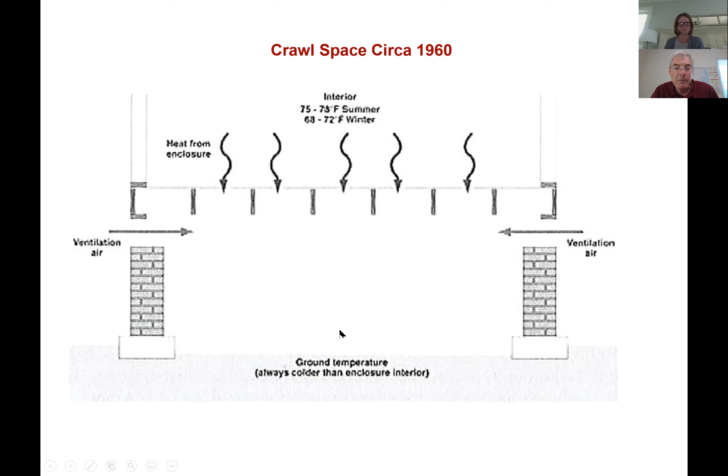Not a lot happening here, but it says the ground temperature was always colder than the enclosure interior. Let's dive down into that a little bit. Heat is transferred three ways: conduction, which happens in the crawl space, convection, and radiation. That means that the inside of a home, if it's 75 degrees inside, by the time that heat transfers all the way down, it's about 67 or 68 degrees on the joist of the crawl space.

It's getting heat from the inside of the home all the way down to 67, 68 degrees, but the ground temperature is 60 degrees. Pretty significant difference between 68 degrees and 60 degrees.

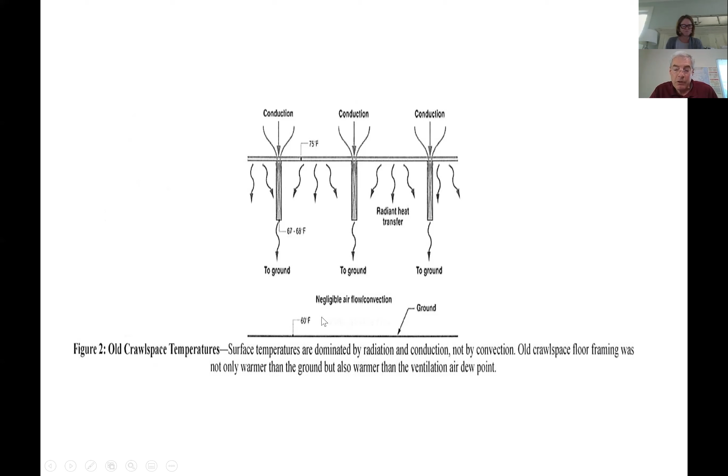So what does that really mean? It means we do live in the hot, humid South. When humidity enters a structure such as the crawl space, it's looking to condensate. Condensation always happens at dew point, or the coldest area, which used to be the ground.

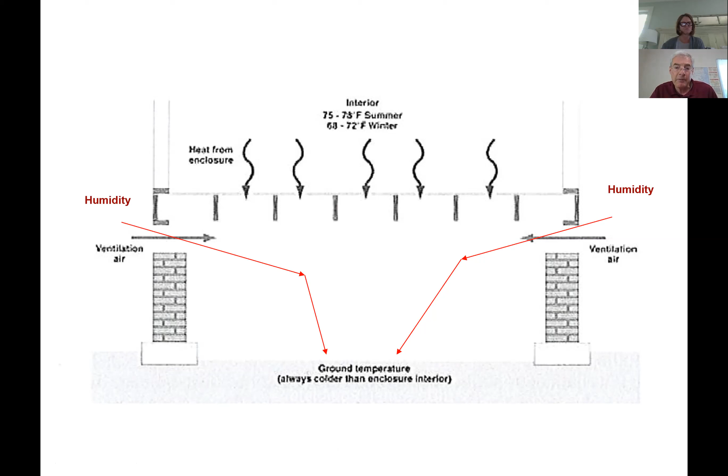Let's get into a little more about dew point. Here's the definition: dew point is the temperature to which air must be cooled to become saturated with water vapor. When further cooled, the airborne water vapor will condense to form liquid water. When air cools to its dew point through contact with a surface that is colder than the air, water will condensate on that surface. So dew point is where this water vapor condensates into water.

Dew point used to be the ground of a crawl space. But something happened in the 70s that changed that. And those of us who remember the 70s know we had some really good things happen, some really ugly things happen, and some bad things happen to crawl spaces in the 70s.

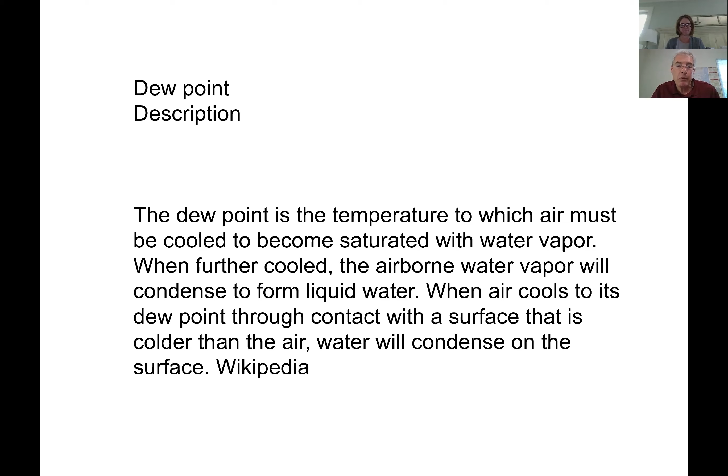So let's start with the good things. What were the good things that happened in the 70s? My personal opinion is that the 70s was the best decade for classic rock and roll that some of us still listen to today. I'll give you Motown for the 60s, but for me, the best decade for rock and roll music was the 70s.

Well, what was the bad thing that happened to crawl spaces? It's one of those unintended consequences, but we had the OPEC oil embargo. Most people remember the gas lines, gasoline being more expensive, people running out of gas, the odd and even days. Basically the cost of energy went up for the first time in history, and the cost of heating a home went up. So what did we do? We insulated everything, including the crawl space.

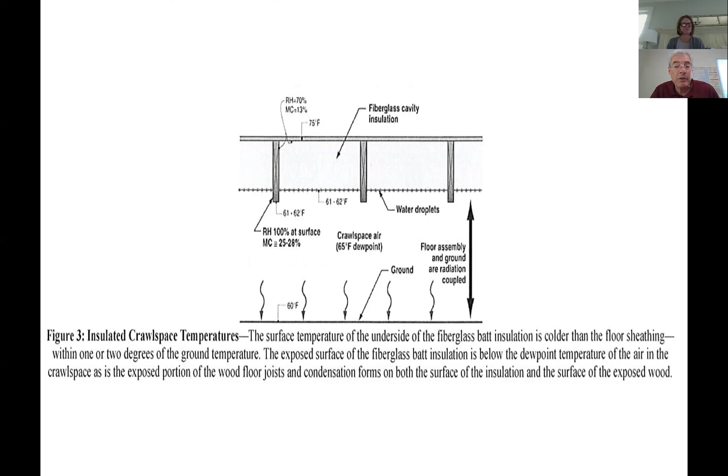Then something else happened in the 70s to most homes—something we in the hot, humid South are so glad of, thanking the good Lord for every summer: we started installing central air conditioning. Great, but guess what? Those ducts are cold. So as humidity comes into the crawl space every summer and no longer collects on the ground, it collects around the air conditioning ducts, in the fiberglass insulation, and on the wood. It collects a little more every year, and the trend line goes up and up, until after about 20 years of absorbing moisture, you get a crawl space that looks something like this.

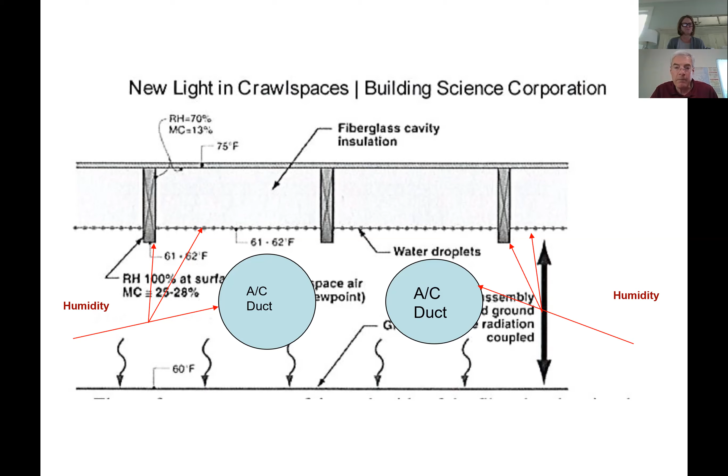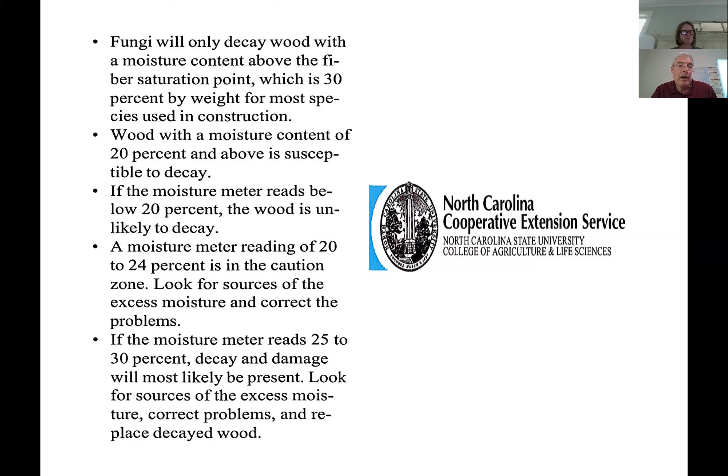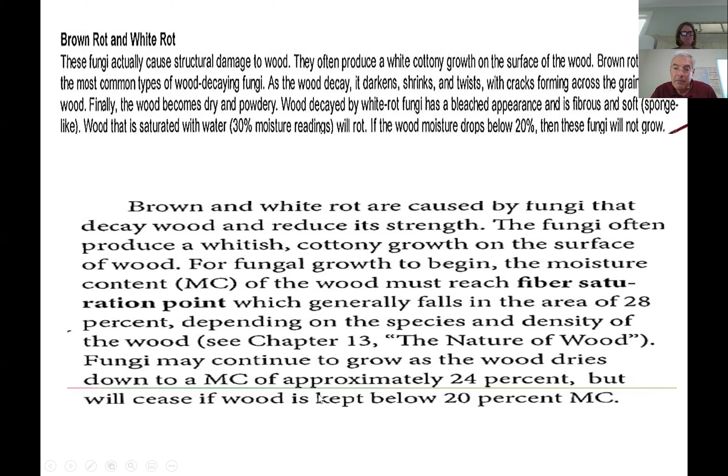This is a picture of white rot in the crawl space. Again, you see the insulation has fallen. I know it's hard to see in this photograph, but white rot has, I call it, body to it. It looks like if you flatten a cotton ball up against the wood. There's other fungi that can occur in a crawl space. It can be on the surface of the wood, it can be gray in appearance. There's multiple fungi that can happen in a crawl space. NC State calls this surface growth. It does not damage the wood, so to speak, but it can be gray in color, with no body to it.

Here's a quick war story. I did have a seller of a home, a very nice home, probably a $500,000 home, call me in tears one day and say, I've got a major issue and I'm moving out today. The moving van was literally in the driveway. We had done some pest control work, but nothing mentioned about issues in moisture in the crawl space. So I went over there, saw the home inspection report. The home inspector didn't say if, and, or but — it said white rot in the crawl space. So I said, let me go check it out. But I also noticed in the inspection report there were no pictures, no evidence of it.

I went down and looked. She did have some surface growth in a few areas, but the wood moisture reading was not high enough to sustain white rot, nor was there any body to that fungal growth. It was just surface growth. But another company had already come in there and quoted $14,000 worth of remediation work for a problem that didn't exist.

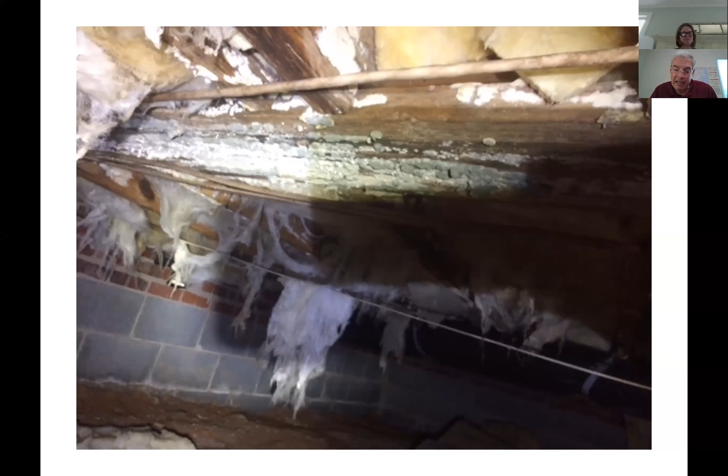And of course, that's what the buyer wanted, and I can kind of understand that. But again, always ask for evidence.

This is another picture of white rot. And what's interesting about this picture is you see there was no insulation in the home. It was an older home. So insulation is not always the culprit. But again, this house...

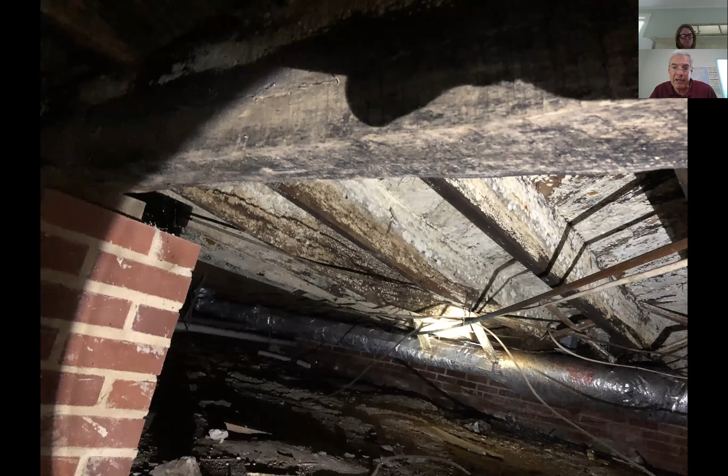Unfortunately, the lady who lived there was using plywood inside the home because the floors in her kitchen were so soft, she was afraid she was going to fall through. And she was about ready to. Basically, her whole floor system had to be replaced.

This is brown rot. Now, you can have fungal growth on the surface of the wood that is dark in color, but it's not necessarily brown rot. To really know it's brown rot, you've got to break open that piece of wood, which isn't hard to do if the wood has been attacked by brown rot.

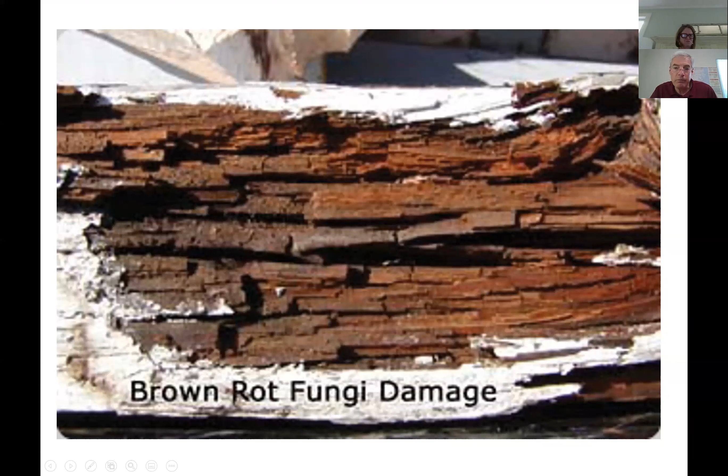You see how they form these little rectangles? That is the evidence of brown rot. On this one, the surface is actually white, but that is brown rot. These fungi will take the strength out of wood very quickly. They make really good tool holders, but you'll have to start replacing joists if you let brown rot or white rot set into a crawl space.

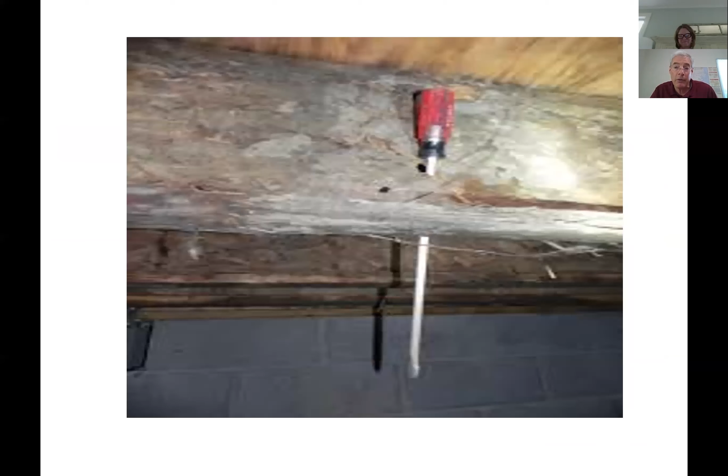Okay, I got a question anyone can answer, through chat or whatever—does anyone want to tell me what kind of growth this is? No, but that's what we see all the time.

Well, it's a trick question because that is not fungal growth. That's actually residue from camel crickets, or cave crickets. Here's a picture, it's hard to see because I blew it up—this is a camel cricket. They love to leave their little residue all over, these little black dots.

But I did have a home inspection report where the home inspector said black mold. And you talk about killing a sale—you just say the word black mold and it's like, okay. He said how he tested for black mold is he took his gloved finger and ran it across the surface, and it smeared. Fungus will smear, and camel cricket feces will not smear.

I'm not a microbiologist, but I remember enough biology from the 8th grade to know that's not how you test for mold. This picture actually came from NC State, it's not mine—something they have on their website about camel cricket residue. But you see that a lot. They love the moisture in the wood and leave their residue all over the place.

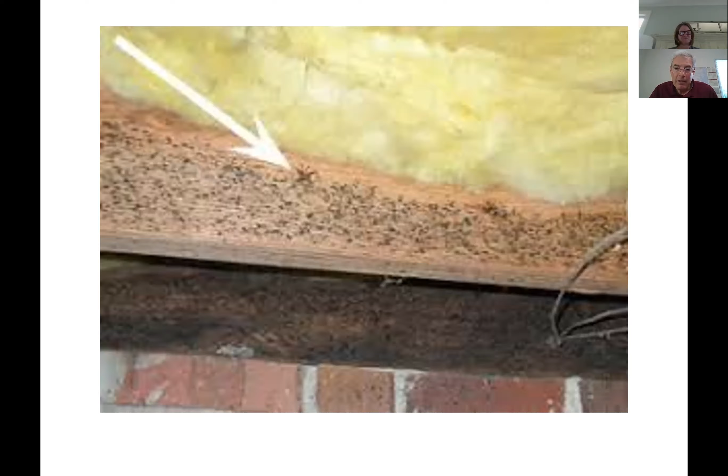Okay, got a pop quiz here. Y'all didn't realize you have a pop quiz, but we now know where crawlspace moisture comes from. We know it takes a little time to develop, and it has to be at least 30% wood moisture. So here's a home—it's got 40% wood moisture content. It's in the danger zone.

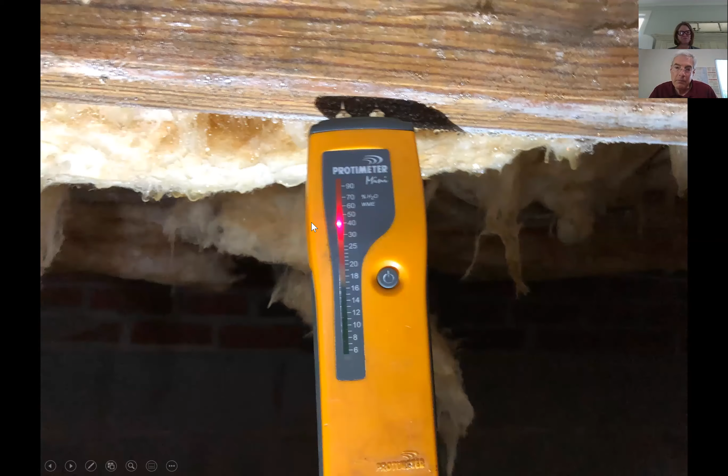If you look at this picture, you see some surface growth, but you see the white that's developing here, the white body—that's actually the start of white rot. It's very difficult to see here, but in this insulation there are beads of condensation. This insulation is just saturated with condensation.

So my question is, does anybody want to guess how old this house was? Let's give them a minute. All right, somebody take a guess.

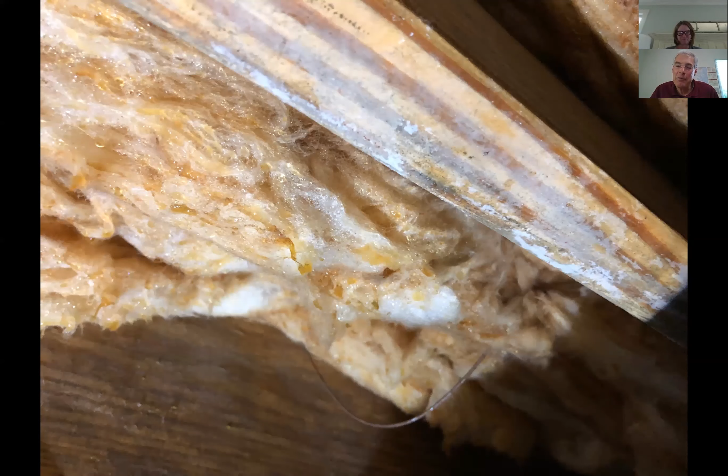Tim Ferguson says a year—okay, not bad. Susie Shackman says it's brand new. Craig says 5 years. Y'all are better—I've had other people say it's got to be about 20 years old. This is the house. It was 3 years old when we discovered the issue.

What caused this? I mean, it's a well-built house—I actually know the builder. This is close to our office here in Burlington. Well-built home, and you talk about a difficult conversation to have with a homeowner—your nice new home here is starting to have rot in its crawl space. What caused this? When they built the house, they put this deck on, a beautiful deck.

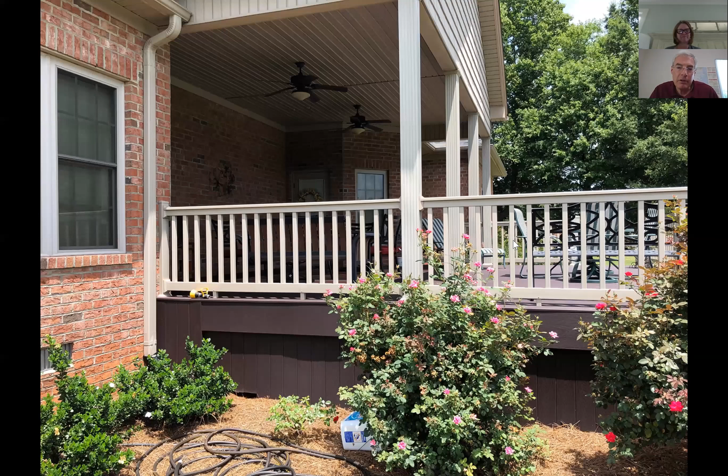This is actually made with Trex, so it's not wood—more like a composite. It's actually underpinned here; the owner's a little elderly and didn't want anything getting under her deck. But it's also on the south side of the house, and when I was there that day, I could not even put my hand on the deck, it was that hot. So you have superheated air coming in, and there are foundation vents underneath this deck.

Superheated air comes in and condensates all along the air conditioning ducts and insulation in the crawl space, and all along her back wall, she was developing white rot, and we had to correct that issue. This is something you can check if a house is being sold or bought: look wherever you see an attached deck or patio, not one that's 10 feet off the ground, but if it's close to the ground, understand it may have an issue with crawl space moisture due to that.

We'll stop here again, any questions now? So we have a question from Tim Ferguson that's probably related a bit more to the first part: is the humidity higher in the house than the usual surrounding air?

Not necessarily. The air conditioning of the home is also a dehumidification part of the home. If you know, around your air conditioning, if it's outside, you'll have a pipe and you'll have water coming out, condensate coming out. What's happening in the air conditioning units of all our homes is that you're actually dehumidifying the inside.

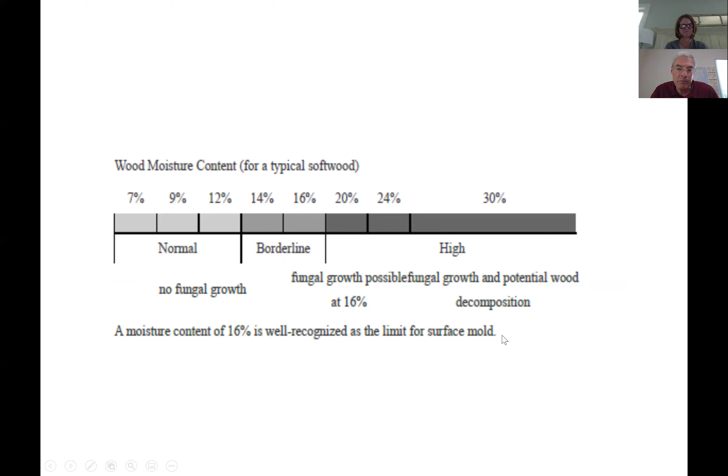This comes from Building Science Corporation. If you see, it says normal is 7 to 12%, 14, 16, and over 20 is high, which I agree with. And down here it says a moisture content of 16% is well recognized as the limit for surface mold. So keep wood moisture under 16%, and you won't even allow surface mold to occur. How dry does that ambient humidity need to be?

We won't worry about water activity, but here is something that gives you the wood moisture content and the ambient humidity in the crawl space. So 70% relative humidity will equate to a wood moisture content of 16%. We like to see wood moisture at 12 to 14%, which is basically 50 to 60% relative humidity. You achieve that by conditioning the crawl space in a few ways, which we'll get to in a little bit.

I think it's interesting, the 20% demarcation for danger in the crawl space, so to speak, that's 80% relative humidity. Crawl spaces can be cool in the summer, but they're also very humid, surprisingly humid.

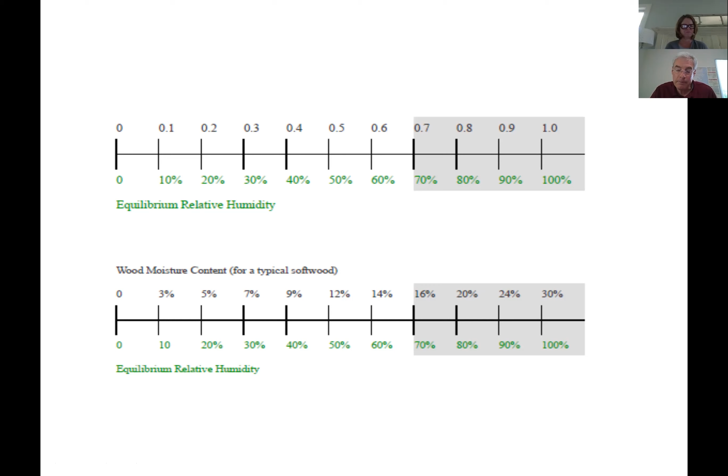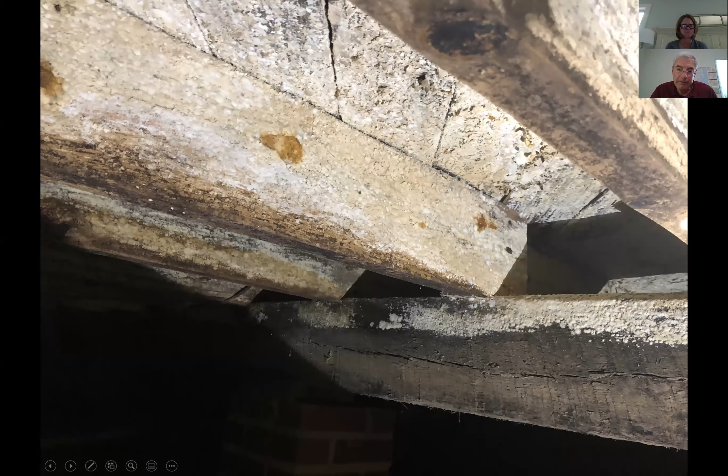It's something called the stack effect, which many of you may have seen. Whether it's your basement or your crawl space, it is cool down here, and as air warms, it rises. Pressure also changes inside a home - if you open up a door or a window, pressure changes, and you pull air from the crawl space into the indoor air, which can affect the quality of indoor air. Certain studies say up to 30% of the indoor air comes from the crawl space. Others say 60%.

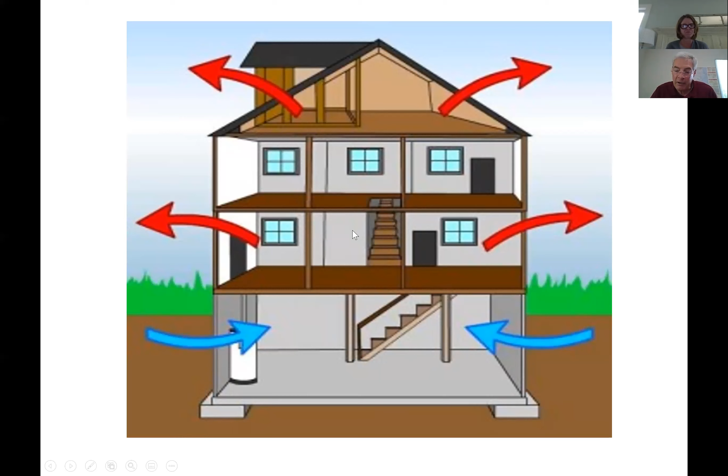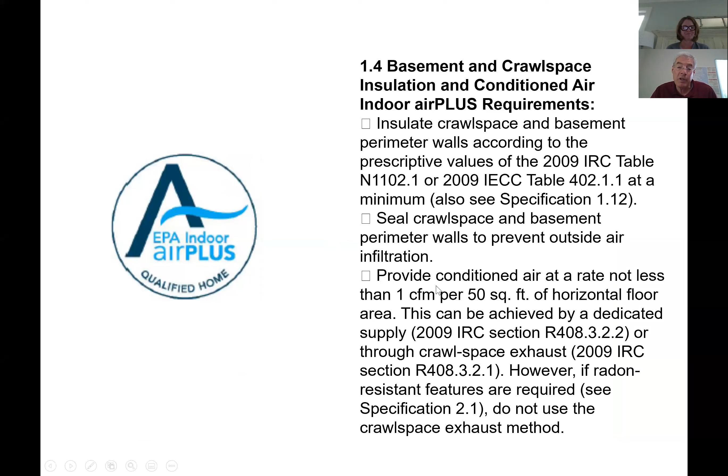It can affect the indoor air, so much so that the EPA came out with guidelines called EPA Indoor Air Plus. These are guidelines for building homes if you're concerned about indoor air quality. The document talks about different things, from what paints to use, to what fabrics to use. But for those of us in hot, humid air, it does say to seal crawl spaces and basement perimeter walls to prevent outside air infiltration and provide conditioned air at a rate not less than 1 cubic foot per minute per 50 square feet of horizontal floor area.

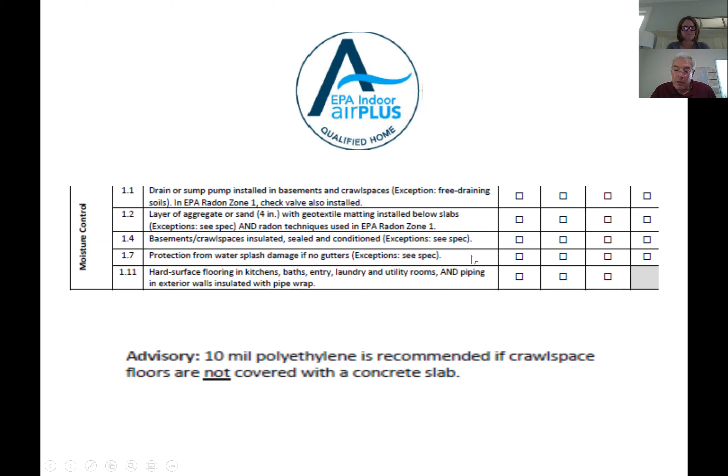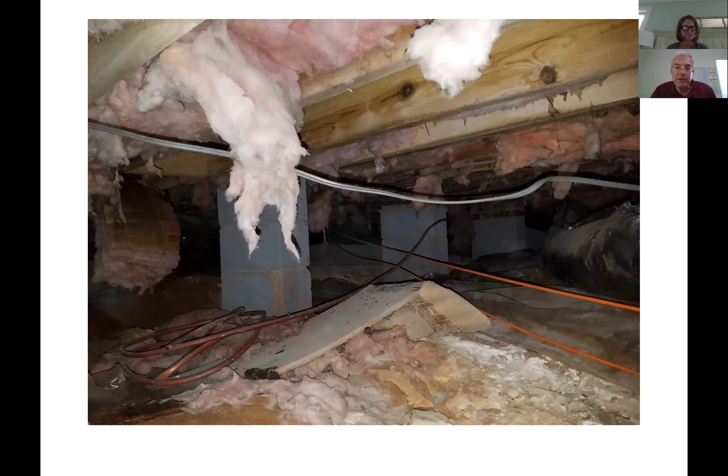Another thing the report says is that for us in the hot, humid South, basement and crawl space should be insulated, sealed, and conditioned, except in flood zones. So what that means is we talk about sealing up the crawl space - this is a before picture. What I want to tell you is that you seal up the crawl space from the inside, you don't close the vents. Here's a picture of the crawl space - here is a vent, and we go from the inside with basically what's called foam board. It's 2.5 inches thick, and we foam around it. The goal is to keep the hot, humid air and the cold air out of the crawl space.

They did have some moisture issues years ago. A contractor went in there and put a dehumidifier in. It wasn't built for the crawl space, number one, but they left the vents open, so they were trying to dehumidify their entire neighborhood. Well, that could be one reason the dehumidifier doesn't work anymore.

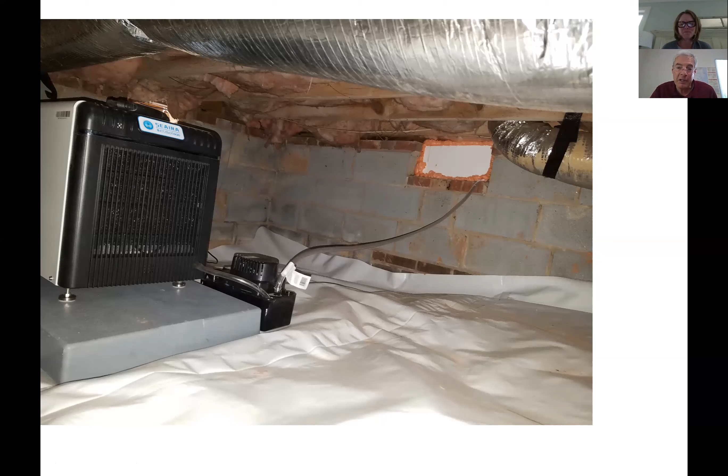Marty, I'm going to stop you just for a second because we're getting a lot of breakup on your end. I don't know if that's your connection going in and out. Let me see - it seems like I have good connection, connection on my phone. Okay, do I need to come back? Let's go for another couple minutes and then maybe, because we're missing some chunks. Okay, good info. Sure, okay.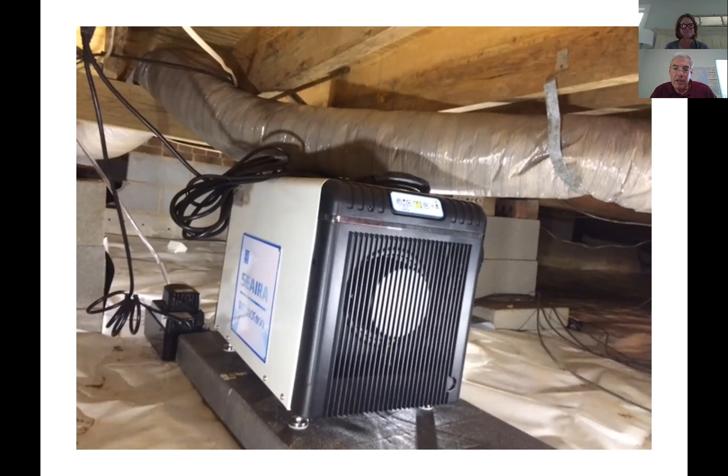Well, this is a conditioned crawl space, and this is our term - you see there's no insulation in the subfloor, it's been removed, no insulation on the wall, but we do put a dehumidifier and obviously a good vapor barrier here. This is the fully encapsulated crawl space, which is the better option, the best option, because there is insulation - not in the subflooring, but there is foam board insulation on the perimeter walls of the crawl space. Good, obviously thicker, 12 mil vapor barrier, dehumidifier.

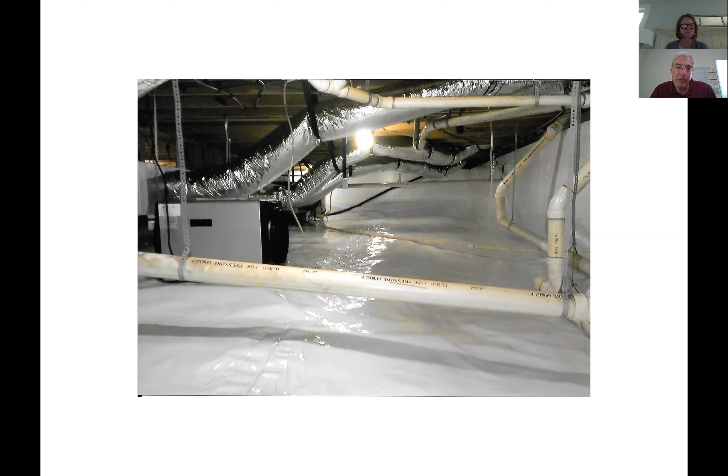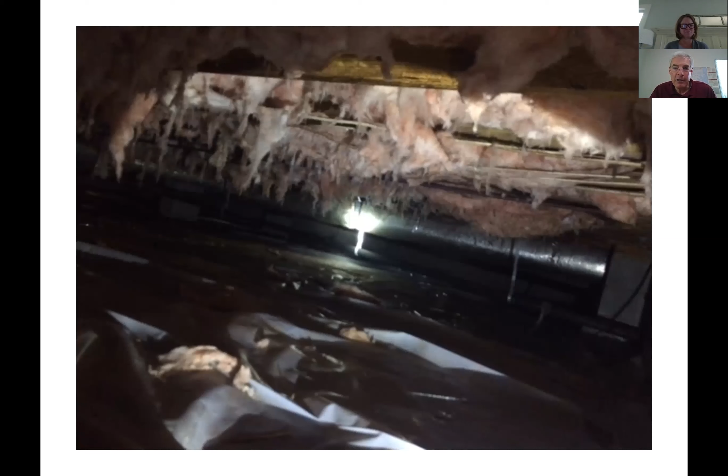On a personal note, my mom had breathing issues most of her adult life. It wasn't asthma, it was allergies, sinus - she was at the ear, nose, and throat doctor about every other month. I grew up in a basement home, which is fun to play in, but it's musty. My dad built a house for them after we all moved out, and that crawl space has no vents in it because they put conditioned air in that crawl space from when it was built, so no fungal growth will occur and the indoor air of their home stays as high as it can be. But what we want to do is not let the crawl space become this, because as realtors, if you have a client selling or buying a house and the crawl space looks like this, there could be major issues and major costs to repair it.

One quick final thing here. I inspected a house years ago. Older homes, as you can tell, have no insulation and thicker cut wood. So it's not a perfect scientific experiment, but you can see the wood moisture readings, where green is good.

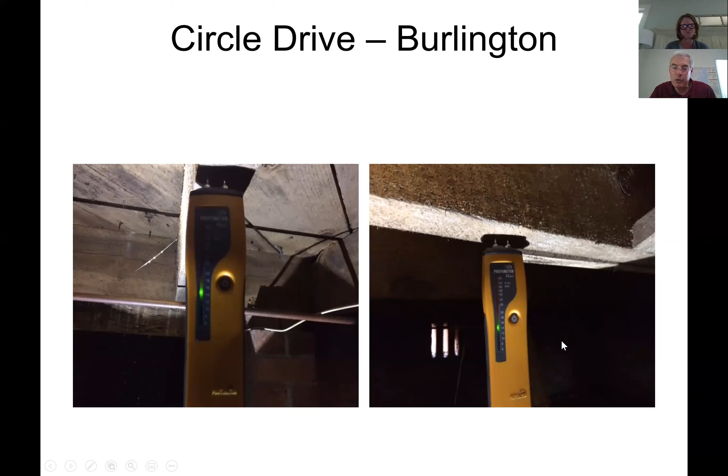It was good wood moisture in the main part of the crawl space. Right behind this area, they added a laundry room about 12 years earlier, and in that laundry room they put insulation. Here's what the wood moisture reading is in that laundry room: it went to the caution area just because all that humidity was collecting up in the insulation, not on the ground like in the main crawl space.

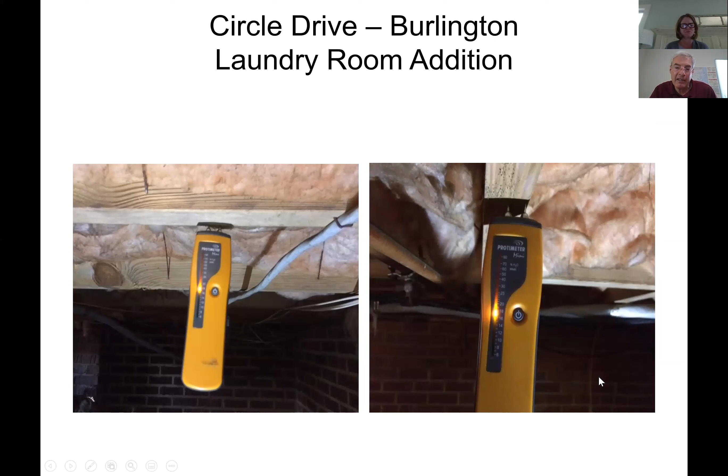So I thought it was good to have some validation. That's my presentation. I'll go back if I need to repeat anything, since I was breaking up a little bit, just let me know, or ask any questions.

Give me a second, I'll see if anybody has any questions. I got a question from Janice, who's trying to better understand the relationship between insulation and humidity.

Yeah, the humidity collects in the insulation over a period of time. Fiberglass insulation does absorb moisture, and you can see in the pictures it all starts to get heavy and it will hold that moisture. The danger is that crawl spaces are ventilated, so hot humid air comes in during the summer, but then cooler dry air can come in during the wintertime. Once that insulation becomes saturated, the wood doesn't have a chance to dry out in the winter, it's holding the moisture against that wood all year long. That's why the insulation, once it's saturated, becomes an issue.

Another question, one of mine too: recommendations for keeping foundation vents open or closed when it's non-encapsulated. Everyone has that question. It goes back and forth, because when I was growing up you'd open them in the spring, close them in the fall, and put a little plastic on the ground, and you're good to go.